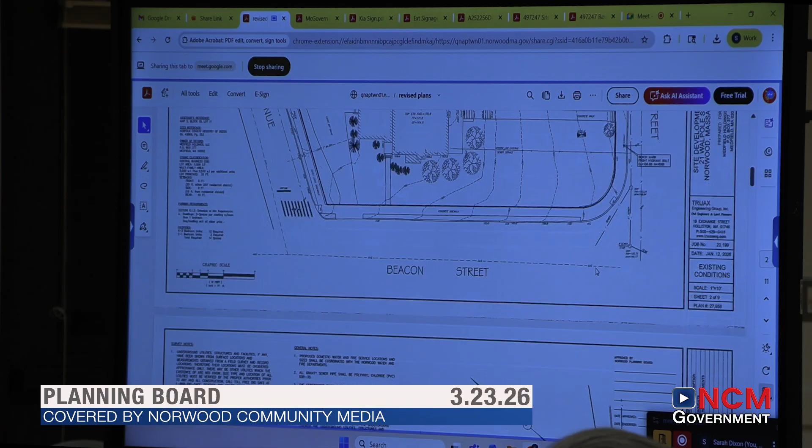So we're gonna take that down, put a new foundation, rebuild that section, take the garage out. We're gonna put a little add-on to, I guess it would be the north lot line, coming out that side, and then the main house is gonna remain. The porch will get rebuilt on the front, that'll all get redone. I'm trying to save, you guys have the renderings, you can see what it's gonna look like when it's finished.

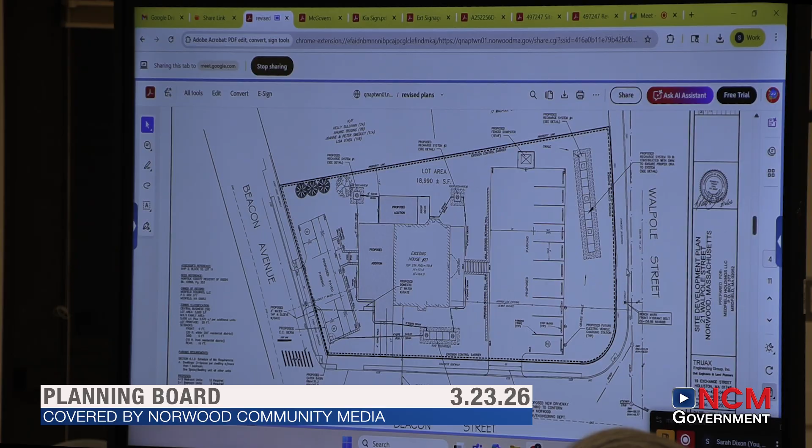So we spread the parking out in two areas. We put 4 spaces up in the back. We originally had 6, and we were backing out onto Beacon Ave, backing straight out onto the street. And after we had the staff meeting, people kind of didn't like the backing out onto the street, so it was recommended that we do something different.

I talked with the building inspector, and that was actually a suggestion of his that we come in and turn to both sides, and we reduce it to 4, and we add a couple spaces out front. Before we had 8 in the front, now we have 10. So we do have 14 spaces for 6 units. We have a total of 10 bedrooms, with 2 one-bedroom units and 4 two-bedroom units. So we have more than 1 space per bedroom within the complex. That's what's required under your regulations and bylaws for parking, 14 spaces based on the bylaw.

We did go out and do some soil testing with the engineering department. We're going to put a recharge system out in the front, all along the street. The parking lot in the front is going to drain, running off the pavement into a grass swale. We'll capture that in the swale and run it down to a leaching galley system. We have 3 catch basins on top of the galleys so the water can get into them. We've oversized that a little bit for a 100-year storm.

I talked with Mark Ryan, because we don't have any drainage directly abutting the site. We don't have any drainage right on Walpole Street, and no drainage on Beacon Ave. So we were concerned about overflow, and we did increase the size of it. Normally we just design for 2 inches of runoff for these type of situations, but we sized it for a 100-year storm event, just in case.

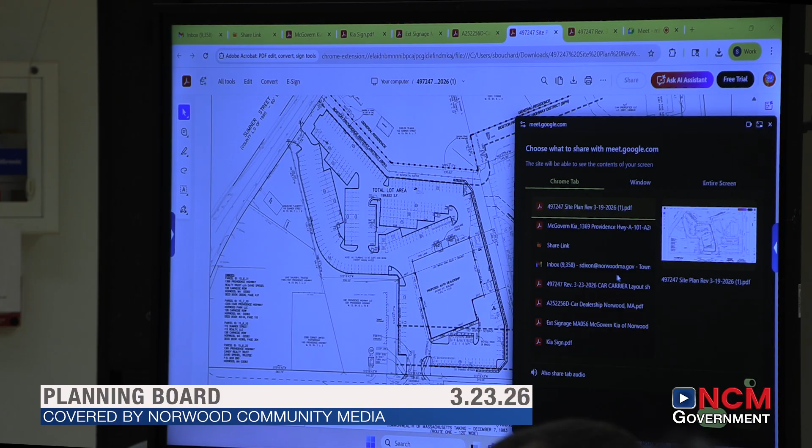As Brian said, we're working with the existing Sky Restaurant site, the Furlong site, and a house at number 112 Sumner Street. The total area is 4.6 acres, with frontage on Route 1 and frontage on Sumner Street. We've designed a proposed Kia dealership for this site. The building will be towards the front of the site, facing Route 1, and the storage and parking of vehicles for sale will be in the back.

In accordance with the regulations, we've designed a 30-foot landscape area between the residence and the development, and we're proposing an 8-foot fence between the residence and the development, as required by your bylaws.

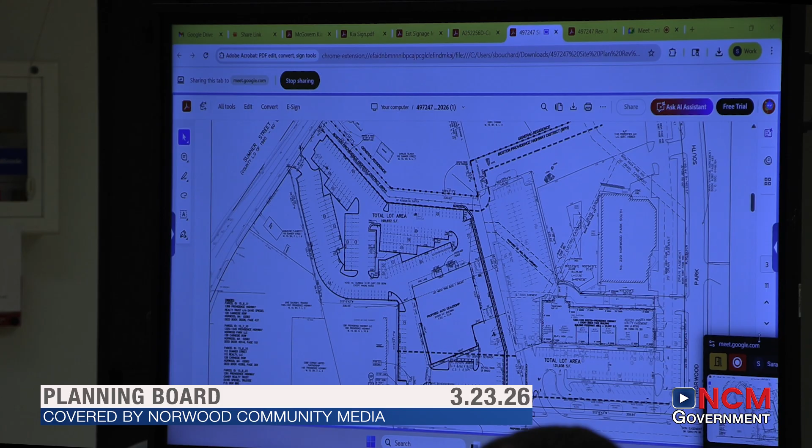Regarding utilities, all of them will come from Route 1, including gas, water, sewer, and electric. The stormwater management plan consists of a treatment train of catch basins, drain manholes, a Contech treatment unit, and concrete infiltrators. We've also added rain gardens and some tree box filters for more of an LID treatment train.

In accordance with your regulations, we recharge 2 inches of stormwater. For the major part of the site, next to the existing retail development, we recharge the entire 25-year storm, including more than 6 inches of recharge for this portion. The back portion of the site recharges 2 inches of stormwater before discharging to Sumner Street. The entire drainage system has been designed to reduce both the rate and volume for the 2-year, 10-year, 25-year, and 100-year storms.

As we said before, we've had two meetings with the town departments. In the last week, we've had a change to the Sumner Street driveway. Originally, we had proposed that cars would be able to come in from Sumner Street and also leave from Sumner Street. After discussions with the town engineer and others in town, we redesigned this driveway to allow only right turn in and left turn in from Sumner Street. We are not proposing to have any cars leave the site and go out to Sumner Street, so what we've designed is an aisle for cars to come in with one-way markings on the pavement.

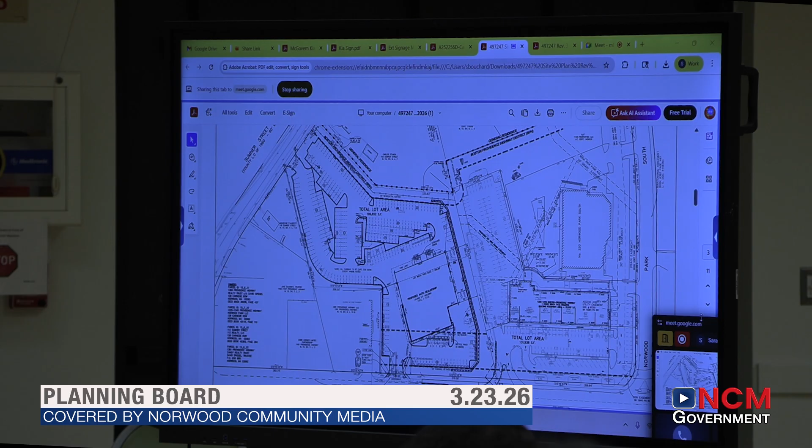We've submitted a landscape plan by K.D. Turner of Landscape Architects. As you can see, it's a very extensive, robust plan. Along the neighbors, we added more trees than required — for example, 12 trees are required and we're providing 26. The rest of the plantings conform with your regulations, with the exception that we're proposing fewer trees in the islands within the site and more trees along the perimeter. We also have street trees along Route 1 as required: 7 trees required and 7 trees provided, plus the required shrubs.

In the package is also a lighting plan that shows that along the residential neighbors there will be less than 0.5 foot candles of light, and along the commercial neighbors there'll be less than 3 foot candles of light. That's your regulations, and we've submitted a lighting plan.

Thank you, Sarah. We also have a sign plan.

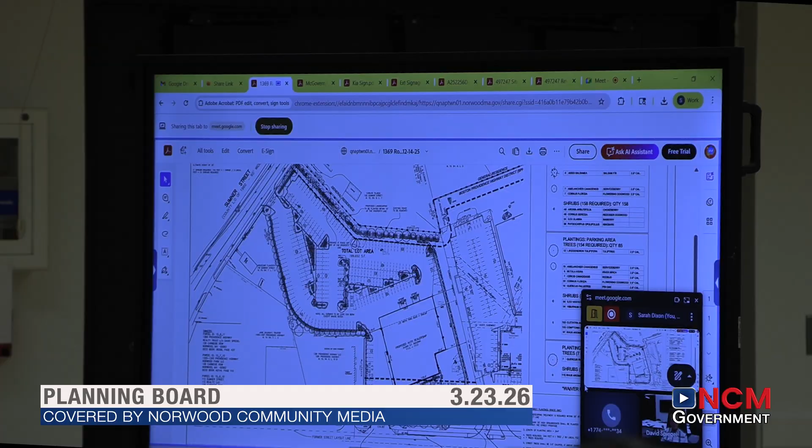We're proposing a standing sign towards the front of the site in this lower right-hand corner. The sign will be 20 feet back from Route 1, but the sign will be 20 feet high, where the requirement at that location is 15 feet.

However, because this is a standard sign done by Kia, I believe it's a very attractive sign. We're asking a waiver to allow that sign to be 20 feet rather than 15 feet. I've also submitted the building signs, and we can go through it if you like, but I'm going to wrap up a little bit. We've also had the sign company submit all the signs to the building.

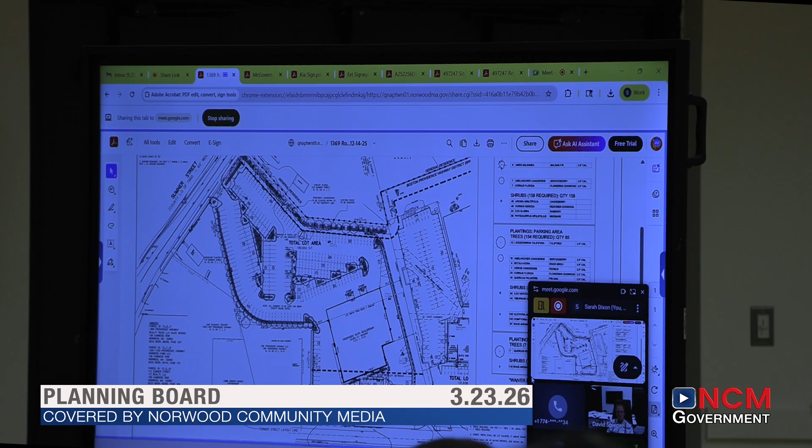So at this time, in a few minutes, we're going to open up for questions. But I'd like to ask if Mr. Matt McGovern from McGovern Auto Group could come up and say a few words. He's developed a lot of these dealerships, very experienced in working with towns and working with neighbors, and I'd like to ask if Matt could say a few words to the board.

Sure, thank you. Good evening, my name is Matt McGovern. I'm the owner of McGovern Auto Group.

We currently own and operate about 40 dealerships in the greater New England area. I actually started my career in the Westwood, Norwood area with the Prime Auto Group previously. So we started our own McGovern Auto Group in 2016, and we've developed several dealerships in the meantime.

Speak into the mic, sorry. Is that better? Yes, great.

So we currently operate the Kia dealership in Norwood at 105 Boston Providence Highway. We bought that dealership about 3 years ago, and we've basically outgrown that dealership. It's a little bit dated, it's too small for us at this point. So we're very excited about acquiring or leasing this property from Mr. Spiegel, and we've put forth a very useful building with appropriate size, appropriate lot, and it will also meet the latest Kia image requirements, which you can tell by our current facility, a little bit dated and not really up to market in terms of look and desirability of the building.

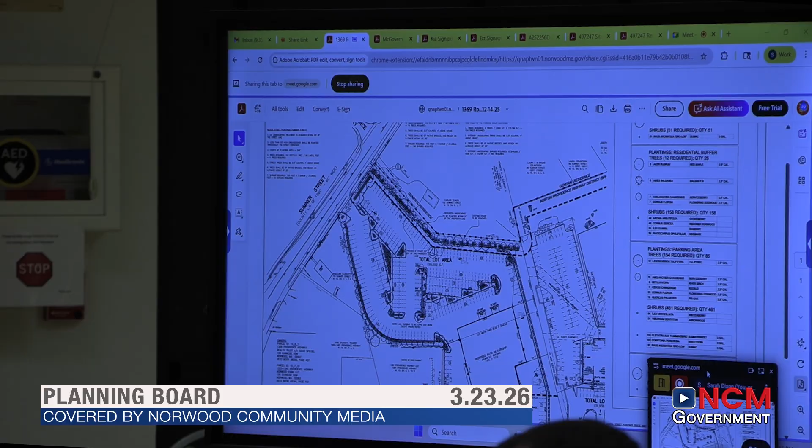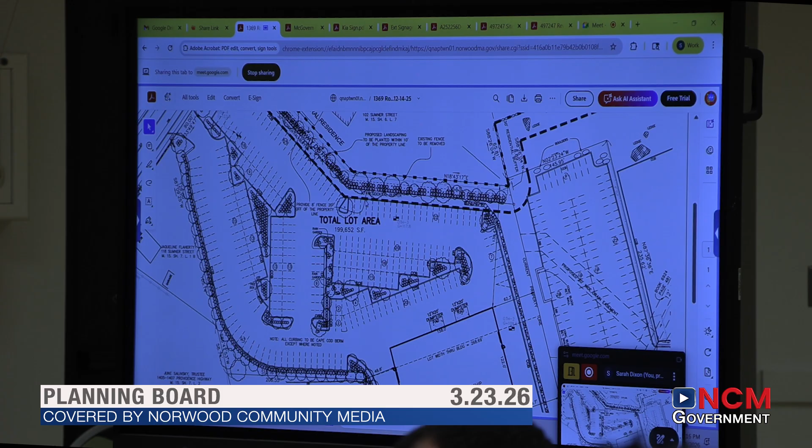I understand where you're coming from, but in this case it really doesn't fit into the design. For a dealership and parking lots, everything has to be about a maximum of 2% grade, which is basically flat, so we have to make the site flat. We have a small retaining wall on one side, and we are building pavement because in order for the dealership to be viable, they need that much pavement to store the cars. But again, we are providing 30 feet of landscaping next to the neighbors, 20 feet on Route 1, and a very large number of trees are going to be planted.

For this type of commercial development, you need to make it flat, so it's not our proposal to save the natural trees on this area that was residential but got rezoned to commercial Boston Providence.

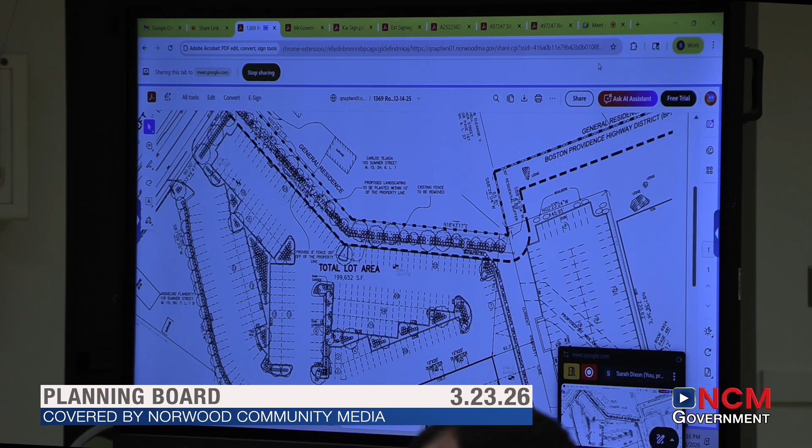Okay, I'll keep asking that. Of course, no, I appreciate the feedback, thank you.

Just one last quick thing, Matt - you mentioned Carly, do you have to go before conservation? No, noticed we there was a puddle in the back, kind of behind what's there now.

No, we don't go before conservation, but she does attend the town department head meetings and we value her opinion. I just noticed there was like a little pond kind of back there - it's not a regulatable wetland, we designed that when we did the occasion banquet facility.

Yeah, I've been around too long, but it used to be Franco's, and then we built that building for the occasions, and then. Used to be Lum's. Yes, exactly. I'll start already, okay sorry, yeah Deb, we can go all night with the boring stories.

I think the only thing we need to hear from is Mark Ryan and perhaps the public safety officer, I'm not sure on that, which is now an entrance. You guys want to have an entrance there? I think in our materials, but first it said they wanted to block it off.

One of the first developments when I got on the board many years ago was the Stop and Shop across the street, and we made sure that people could only take a right and not a left. So this is somewhat similar, where you wouldn't have to certainly block that off. I guess that is up to the town engineer and public safety officer, but it sounds to me like a good solution.